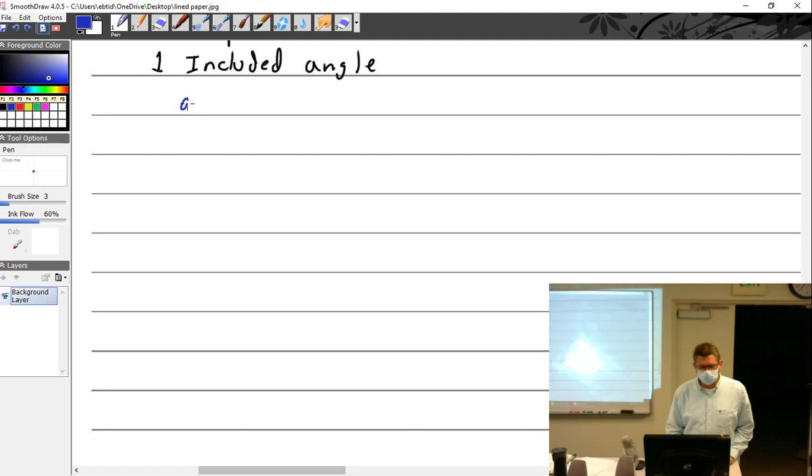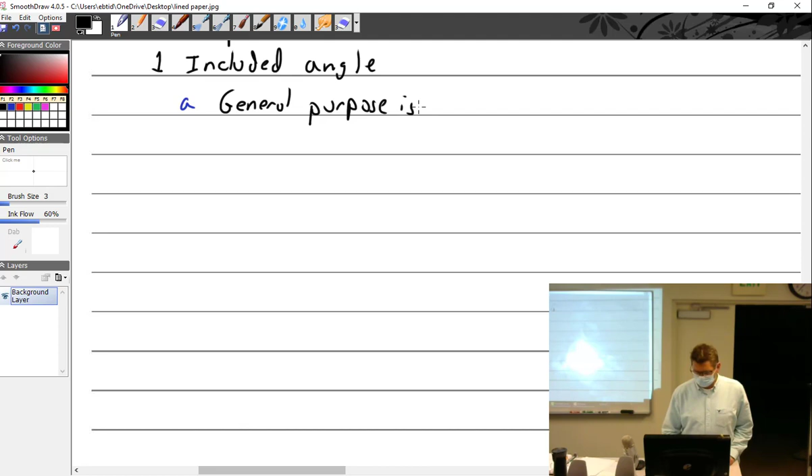The included angle—that is more or less the angle of the drill bit. So for general purpose, it's 118 degrees.

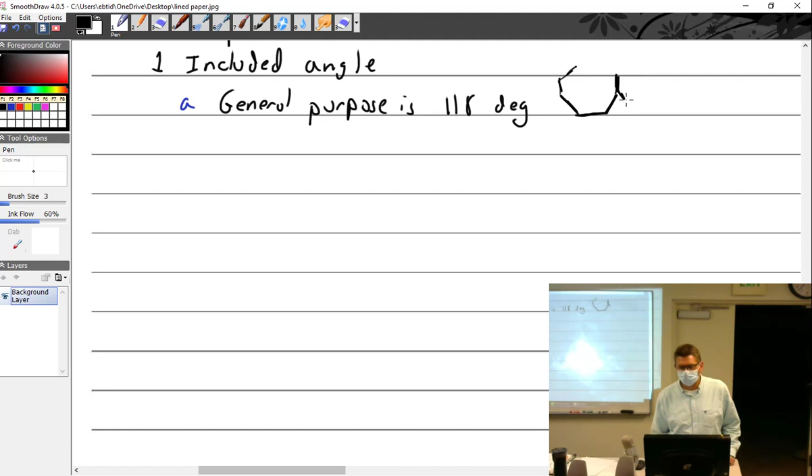True story: if I could draw an actual aircraft nut—that part's not important—and I put two of them right next to each other, this area right here is 118 degrees. So in a pinch, you can use two large nuts, if you were that into it.

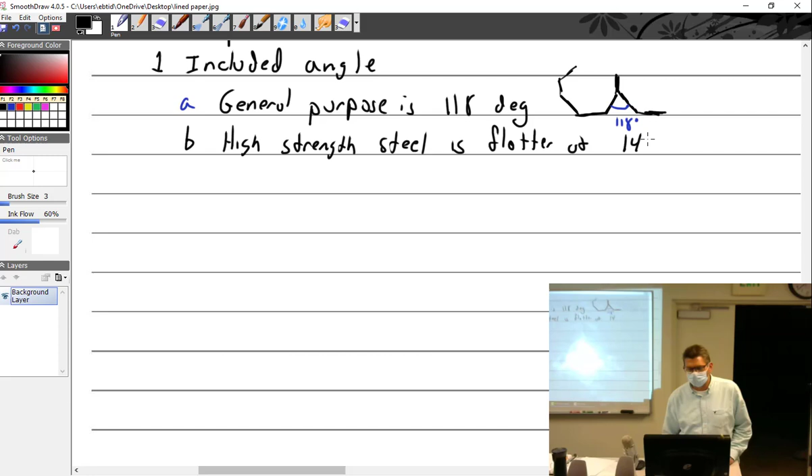Okay, high strength steel is flatter, at 140 degrees. And this allows more of the drill to make contact, especially when starting.

Would that also allow you to put more force behind it without damaging the drill bit? Sure, it sounds logical, I like that. This allows more of the drill to make contact—where was I—especially when starting.

All right, drills for softer material. Hope there's not a lot more notes because I'm on the last page of my notebook. Just tell me, I'll be done, I'll stop writing too.

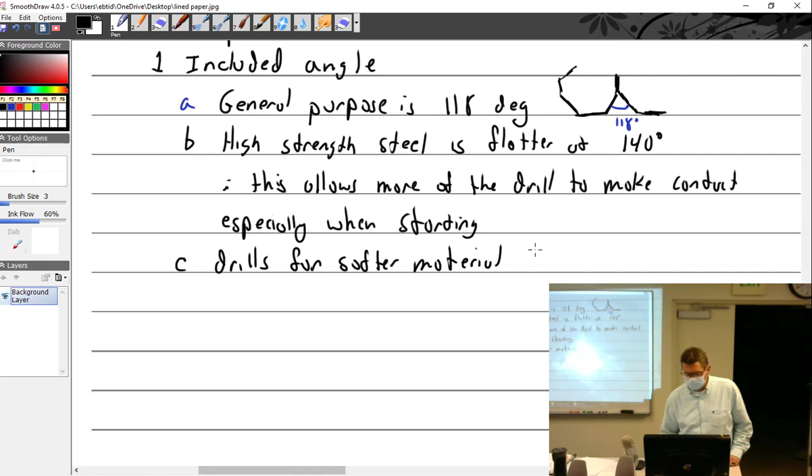Have more of a point, where that would be 90 degrees. And that allows less of the cutting lips to make contact.

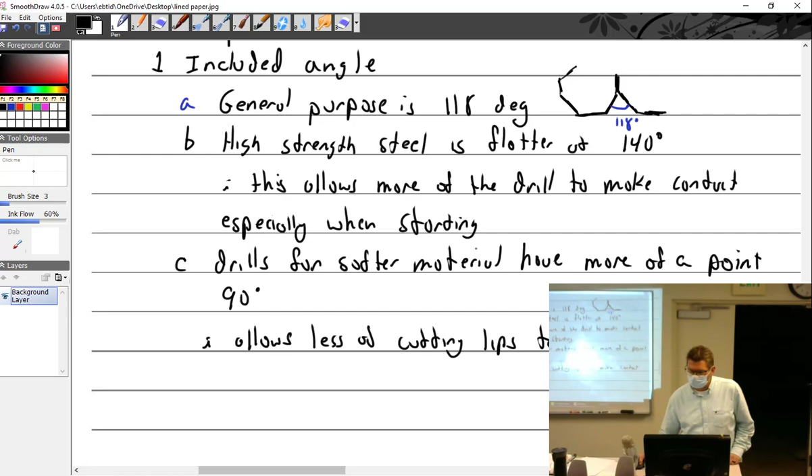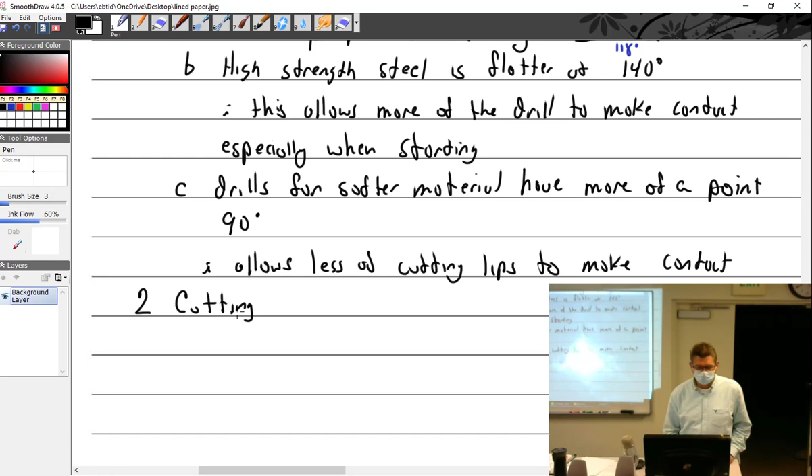Make contact. There we go. All right, so this would be point 2, because 1 was included angle, because we're talking about the drill point. Now we have the cutting lips, and that is also the cutting edges.

Why would you want less, for 90 degrees, why would you want less? You have to be careful when you're doing soft material, in that the drill bit actually starts to grab and will pull itself in. And then when it pulls itself in, it gets to the back and it blows out the back.

Which is why when you're drilling plexiglass, you have to do two things—Larry will do more with plexiglass—but you always back it up, and you have to go through the plexi into something else. And you actually get rid of the cutting lips, you grind them down so they're flat, and they can't actually get a grip on anything. So it just burns its way through.

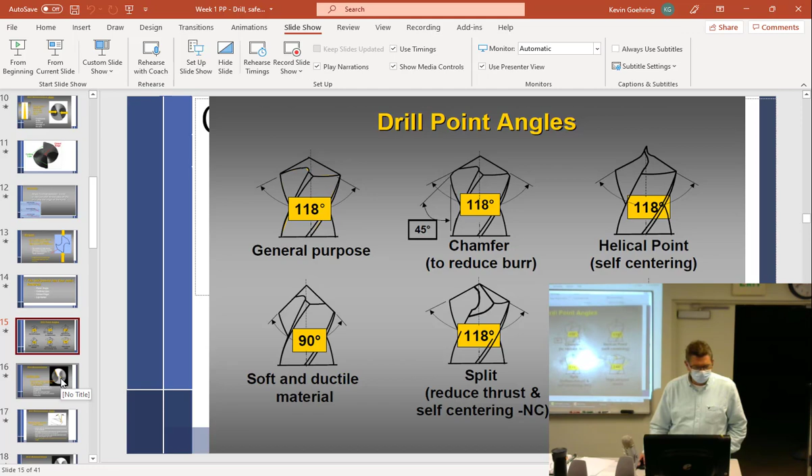Cutting lips, okay, cutting edges, let me see. How was it for that? The relief angle. Let me see if I can do a picture here, relief angle. Got that, we got cutting lips, okay, there we go. Cutting edges that extend from the center of the drill to the outer diameter.

One of the things I'm looking for when you sharpen your drill bit is called facets. A facet, like if you consider a diamond ring or something, all the little angles, that's a facet. So there is not a bunch of different angles built into this. It is one...

Smooth piece across. So if I hold it up in the light and I can see 27 different angles, like, no, that's not right. Actually, even 2 or 3 is not right. Let me see, okay, that's the best one I think I can come up with here. Let's try this. The relief angle, this right here has to be the highest point of the drill bit. Because if this right here out towards the middle is the highest point, then what happens? Oblong? Let me see.

So, all right, if this happened to be the highest point, and this is the highest point, in other words, it starts sloping down this way, and it starts sloping down that way. So when I put the drill in the drill press and I go to start cutting a piece of metal, and this is where it starts touching first, what's going to happen?

It's just going to ride on it. This is going to—you can melt a hole, but where's your cutting lips? Over here. So if your cutting lips are down low, down here, and then it goes up to this point and back down, so it's just rubbing out in the middle, are you going to cut anything with this section right here?

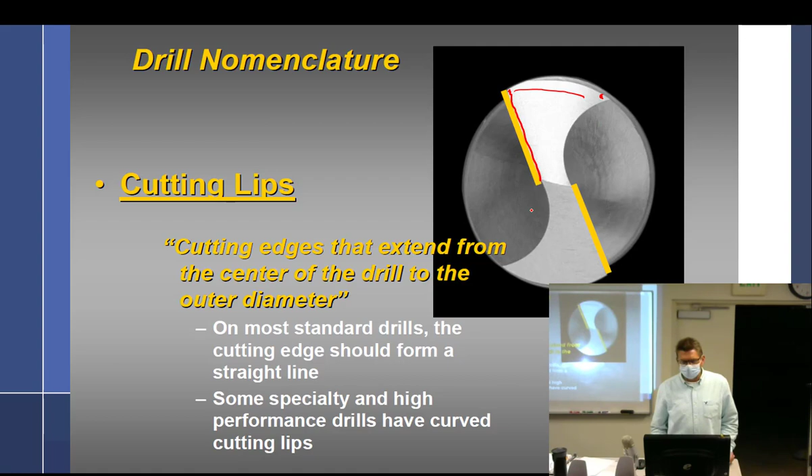I forget what button—jeez, there we go. This right here is the high side, right? This is the tallest, and then from there it slowly goes down to the heel right here. Yeah? Okay, so that angle that is formed right there is what I call the relief angle. And that's kind of what that's depicting, but in a really crappy way.

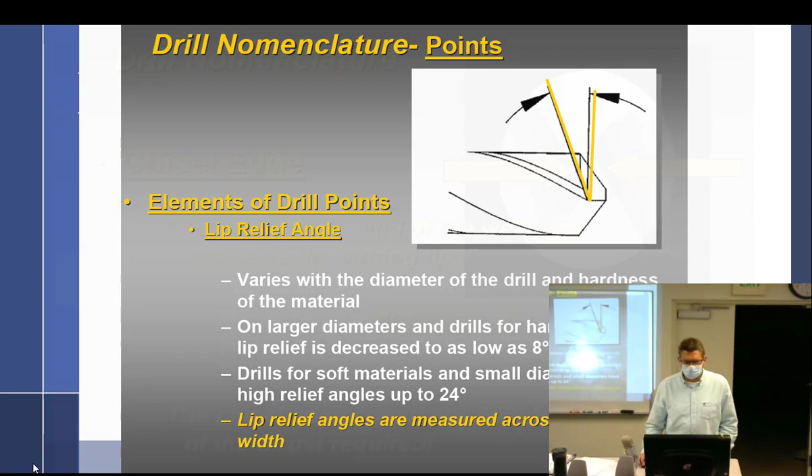I don't know what else we got now. The angle from the cutting lips to the heel. Yeah, it's actually this angle, because these are flat right here. So that actually angles down like that, and so it's that angle right there. It's not as flat as they would make you believe.

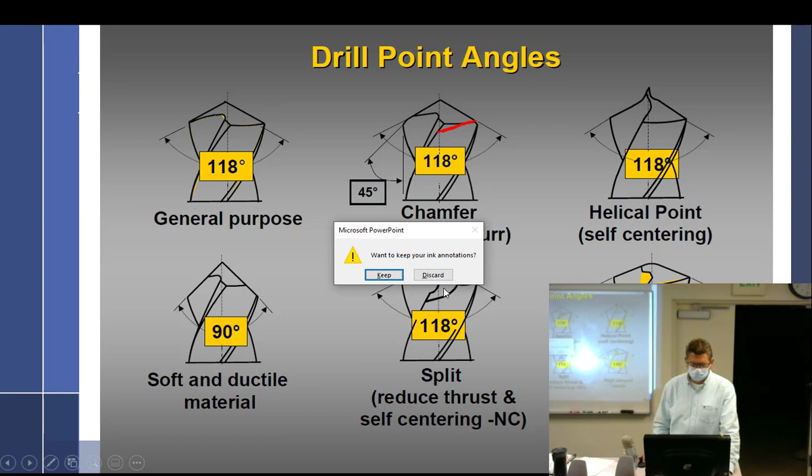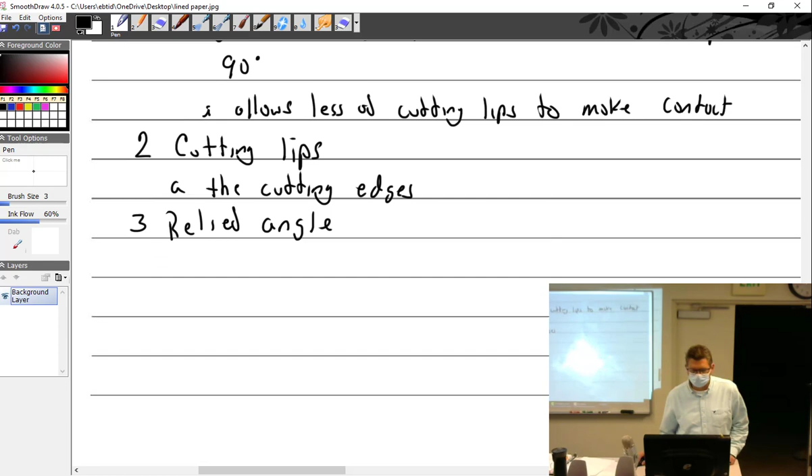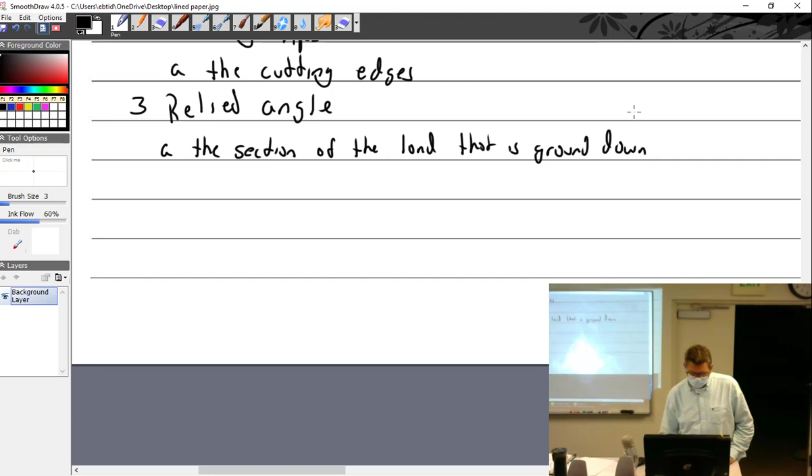All right, relief angle is... relief angle, I'm almost out of paper too, so yeah, we're almost done. The section of the land that is ground down, leaving the lip higher. So, the section of the land that is ground down, leaving the lip, or cutting edge, higher.

So without the relief, the entire land would rub on the work and overheat the drill. Without the relief, the entire land would rub on the work and overheat the drill.

And the work. By the way, what's the hottest you can get your aluminum? I don't know. About 700 degrees, is it? 680, 700? How high can you get, say, 2024 T3, without affecting its properties? I don't know, about 300 degrees. Well, you guys melt at 1200, right? Boiling water, 212? Yeah.

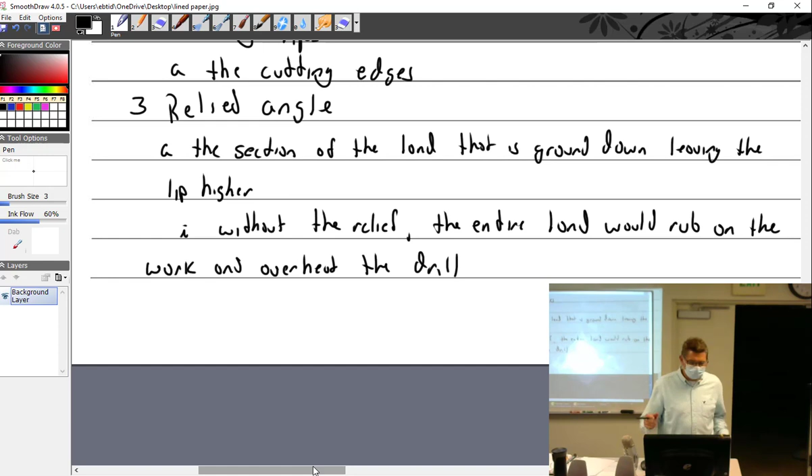That's not very warm. I think it says in 43.13 or somewhere, not supposed to go over boiling. So even using the grinding disc out there, if you put it on there for too long, it'll start affecting it. Yeah. Yeah, if you get it that hot, absolutely.

Although I worked with one guy, very clever guy, I'll give him that, a very, very good mechanic. So what is O? 2024-O, untreated. Non-structural. Okay, non-structural, non-rigid. When do I want to use O material? It's too flimsy. When do I want to use it? You want to shape, make your metal form. Forming, shaping. So it's non-structural, or for forming, and then it could be structural later.

So he was making a nose bowl or something for an Aeronca or something, very low horsepower, and so that's a non-structural issue. It's just a cowling, it's no structure, it's just aesthetics, but it's a complex curve. We didn't have any O, or didn't have what we wanted, and so he had read some article. It was really cool. He goes, 'Watch this,' and he takes a Sharpie and just scribbles on it, and then lights the torch, the rosebud, on the torch. He just starts heating this thing up, heating it up, and suddenly the Sharpie disappears. He goes, 'It's done,' and let it cool, and it was basically annealed. It was O at that point.

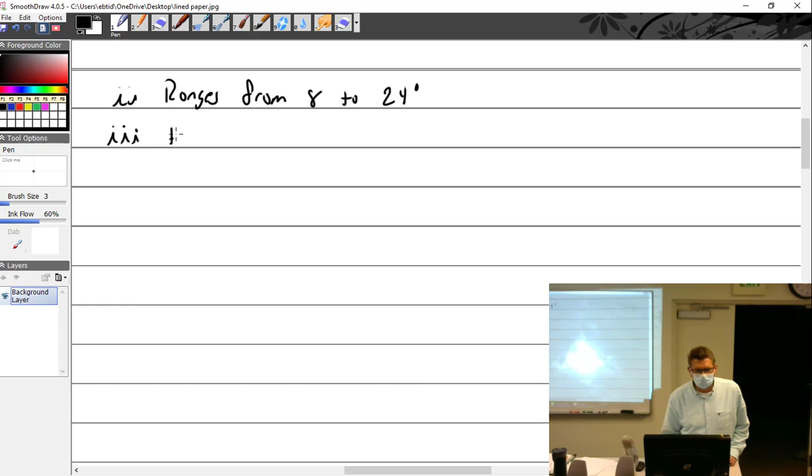Okay, higher angle. If you have a higher angle, the corners of the lip will break or chip, because you've got the cutting edge right there, and if the angle comes way down, there's nothing backing up the lips, so they have the potential to break. But if you flatten it too much, then you get more rubbing. So there's this happy medium. Lower angles—a lower angle requires more pressure.

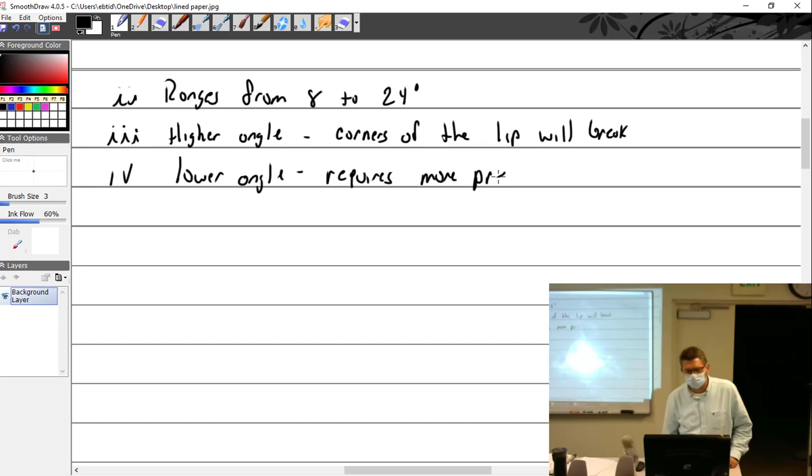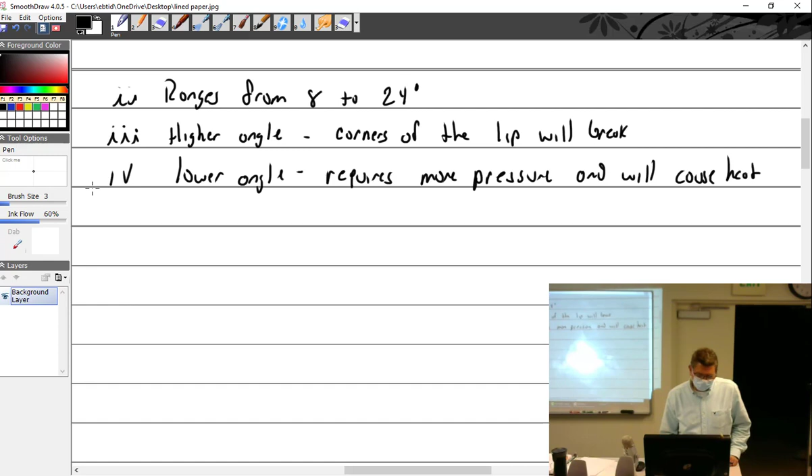More pressure will cause heat. And heat is bad because we should not be heating up our heat-treated aluminum past... yeah, I think that's right out of it. This sounds like something I added. And inverted angle just means heat.

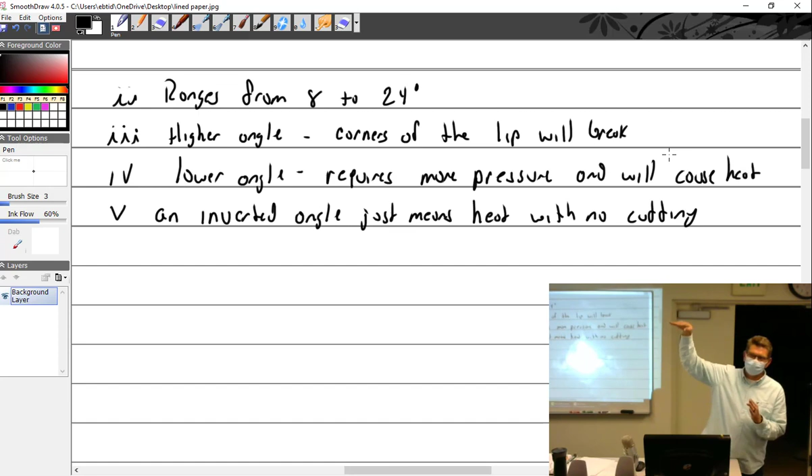With no cutting. In other words, the actual cutting lip is down below the rest of the drill bit. It kind of starts high and goes down low to the cutting angle. Well, that's just not going to work.

All right, chisel edge. I don't know, there's not much you can say about the chisel edge. It just is what it is. Well, hang on, chisel edge angle is what I wrote. That's not an angle you're going to mess with too much. Wouldn't that just be the cutting lip angle? Yes and no, I'll show you.

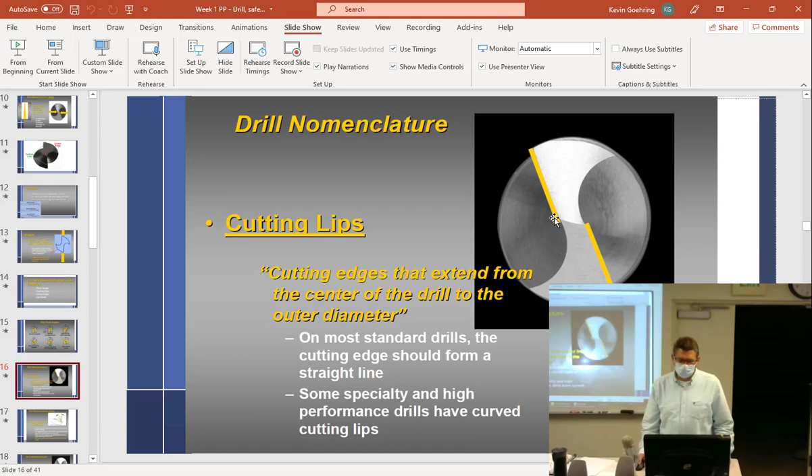So it's this angle right here, between here and here. I'm sure I have a slide for it. So there we go. We had the lip relief angle, which we just talked about.

Chisel edge, there we go. We talked about that. Chisel edge does not cut, it penetrates, displacing the workpiece material. Chisel edge consumes 60 to 70% of the thrust required. So the bigger it is, the more you're going to be putting on there. So the chisel edge angle then is, like I said, from here to here. Good luck changing that, it's going to be very difficult.

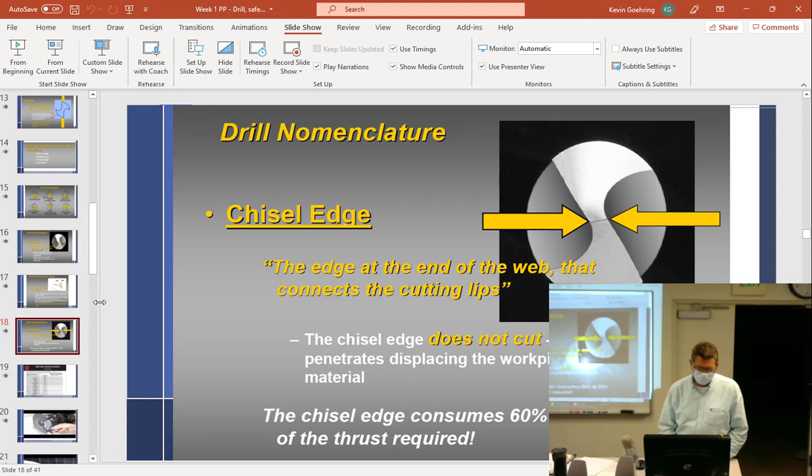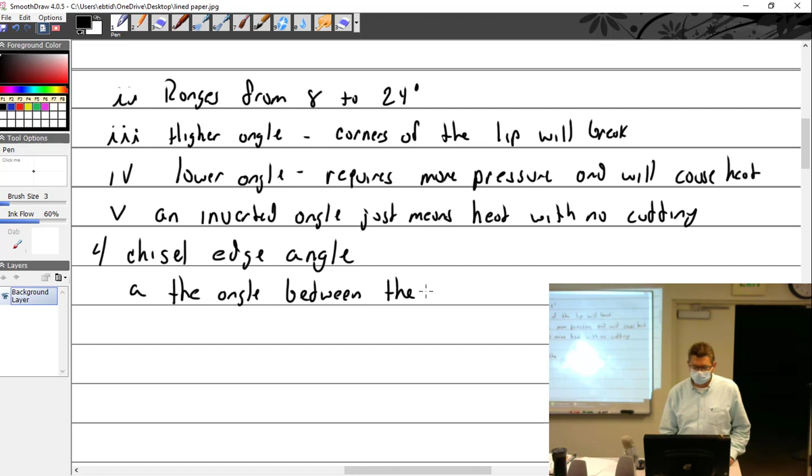The angle between... angle between the chisel edge. What happens to the chisel edge as the drill gets shorter? It's wider, bigger. Okay, chisel edge and the cutting lip.

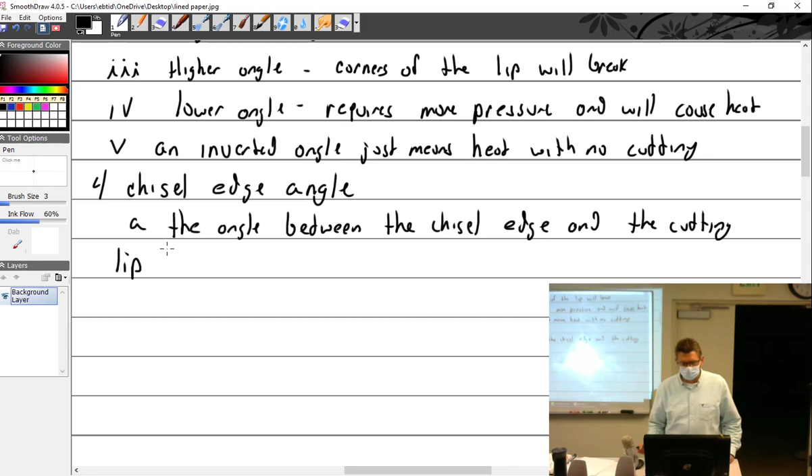All right, let's see. That brings us to drilling speeds. Hey, let's go back up here and go here.

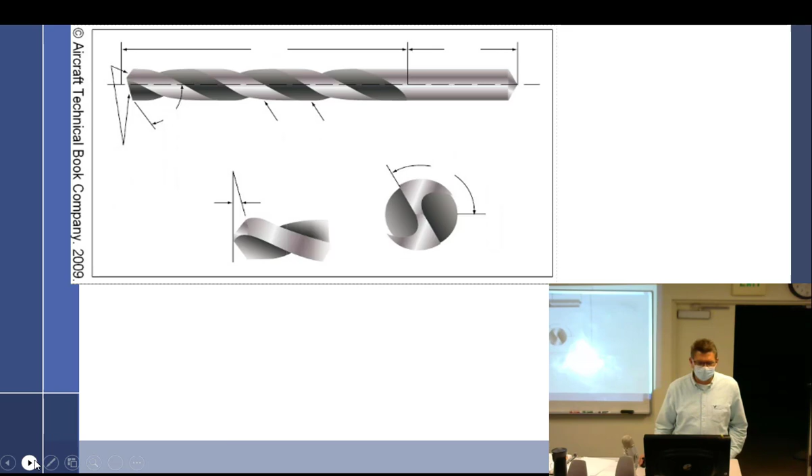There, all right, so you got your thing here, right? Okay, your paper. This right here in the little blue book, and a lot of books, I forget what they call it. It's just ridiculous, I forget what that is, but it's like, no, I don't think so. Let me see, there we go. Well, that would be better if it was readable, wouldn't it? Well, it is right there. So, yeah, the lip clearance angle, no, that is not. I don't know what the hell they're trying to say right there. That makes no sense to what that is, so ignore that.

So we got the heel angle, or what did we call it earlier? The relief angle, I called this the relief angle. So we have the body, the shank, the flute, the land, and then next to the land is the margin. I do like this right here, the lip clearance angle, that makes sense to me, the lip clearance angle right there. And then you have the cutting edges right there and there.

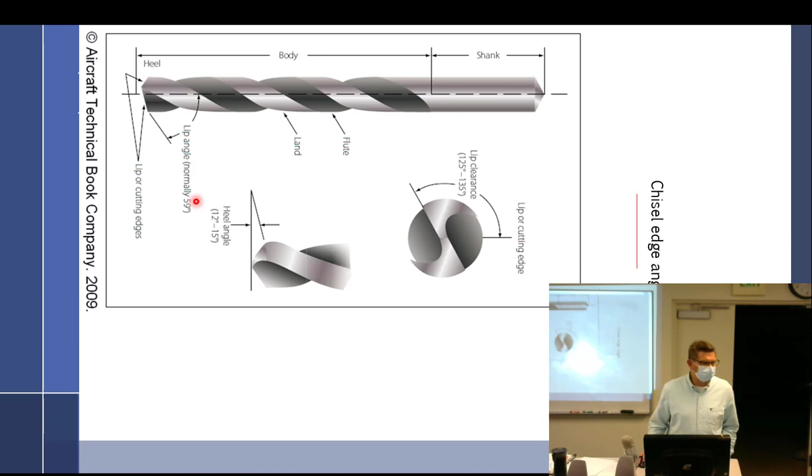I don't worry about this heel angle. It's almost the same to me as what they're trying to show with the lip clearance angle. I'm going to rotate it. Hang on, let's go this one, I like this one better, you can see that one.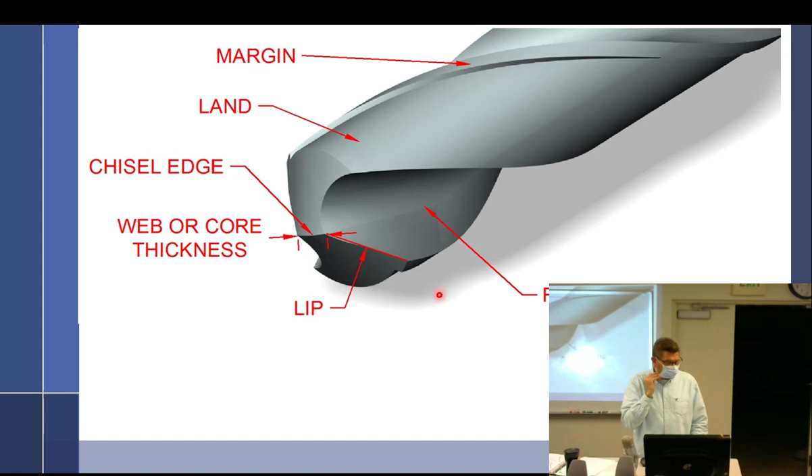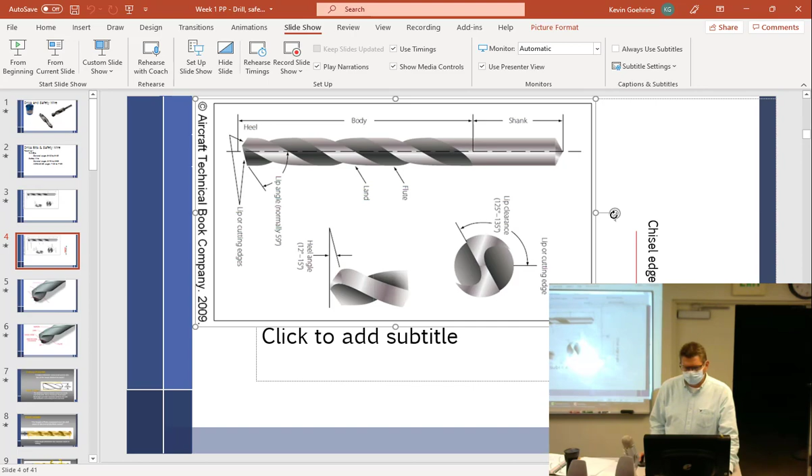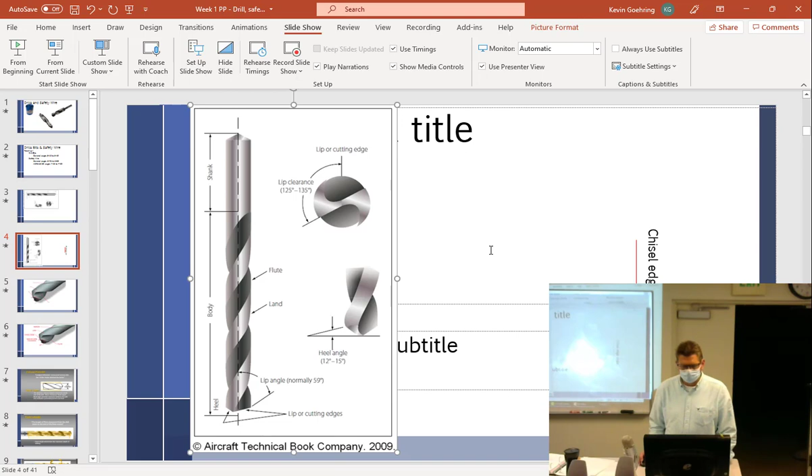Got it? All right, let's go back. Let me see. It'd be easier if I go this. I know I should, you want me to rotate it? Well, I gotta make it smaller. Give me 1 second.

Well, look at that, that's just being fancy. This, I don't even, do I have that on there? Just leave it blank. Yeah, it's not really, to me, the lip clearance angle right there at all. I don't know what they're depicting. That makes no sense to me.

It's this lip angle right here is what I'm more interested in. Oh, that's not the lip, that's the included angle right here. So lip angle, I would call it the included angle, 59 degrees, it's 118. So we called it the included angle.

This heel angle, I call that, well, it's more depictive of the relief angle, if you ask me. Could you call that lip clearance the chisel edge angle? I would, except that it doesn't line up with this chisel edge. If it did, I would call it that. So I don't know what the heck they're saying. I mean, this point right here is nothing to me.

Well, just change it. Draw your line, make her own line, make it your own, yeah. So I don't worry about everything on there, it's not that important. Okay, can I move on? All right.

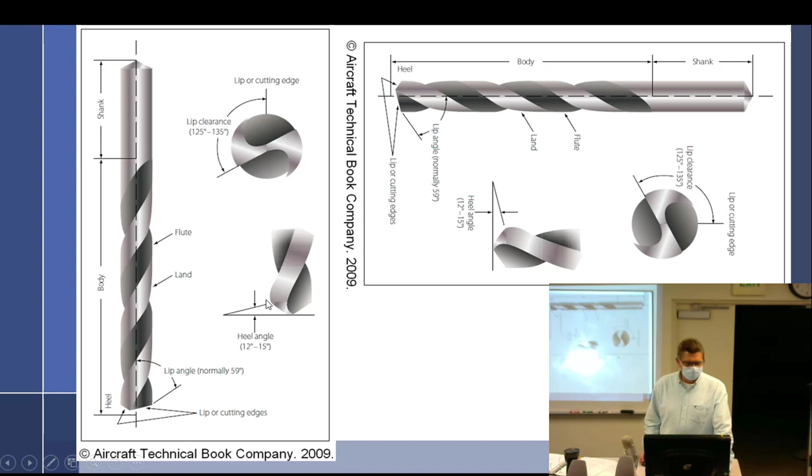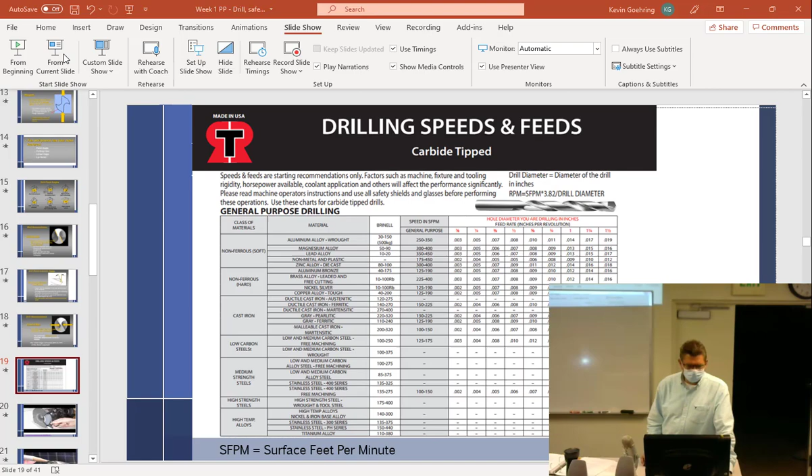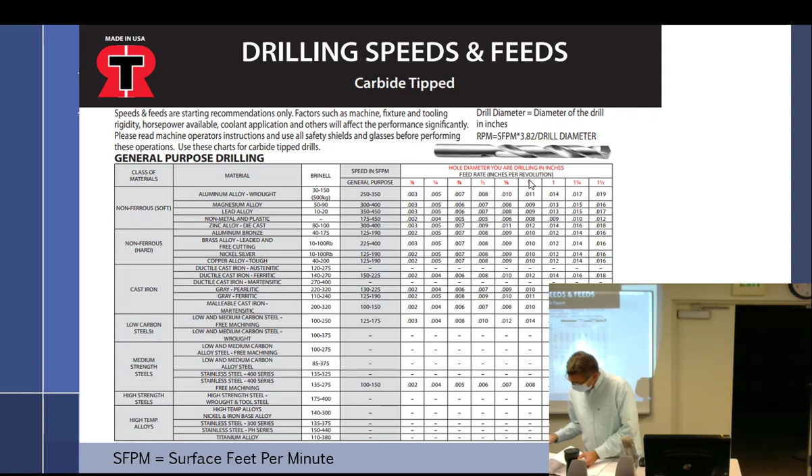Let me see, I'll take a look at this. I just threw this in here for fun, I think. Let me see. Do I talk about it? Oh, I get into this a little bit. I gotta circle back around.

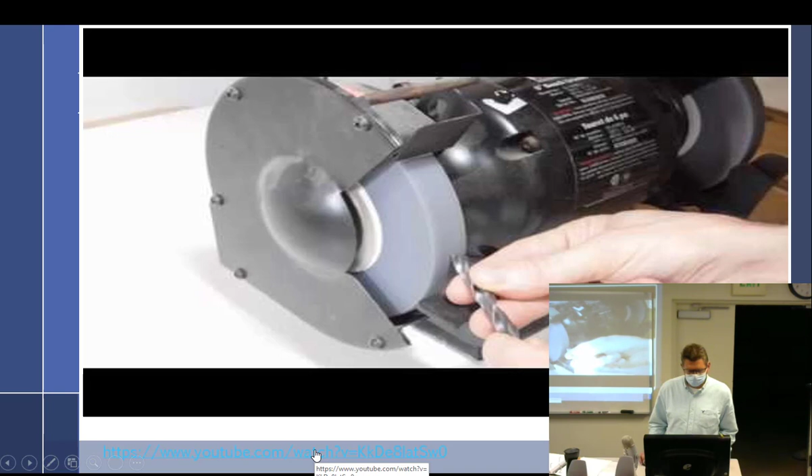Feeds, all right. See a video? I like that. Just 20 minutes, so yeah, long time. How much time is it?

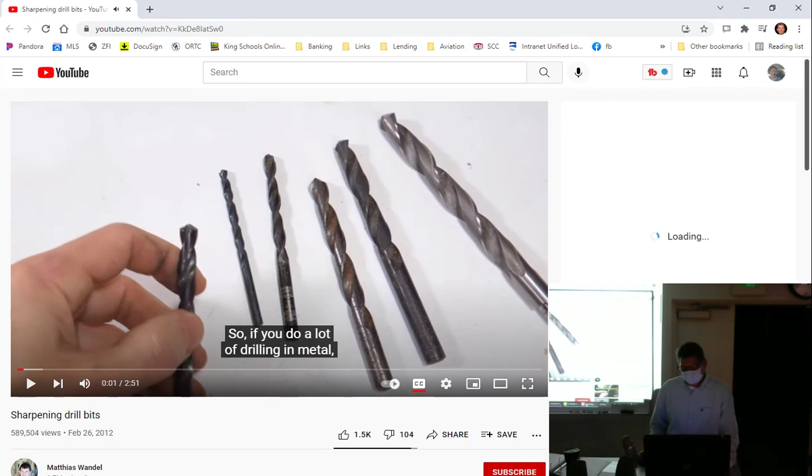Speaking of goats. So if you do a lot of drilling in metal, forgot. I gotta stop the recording because YouTube will flag it.